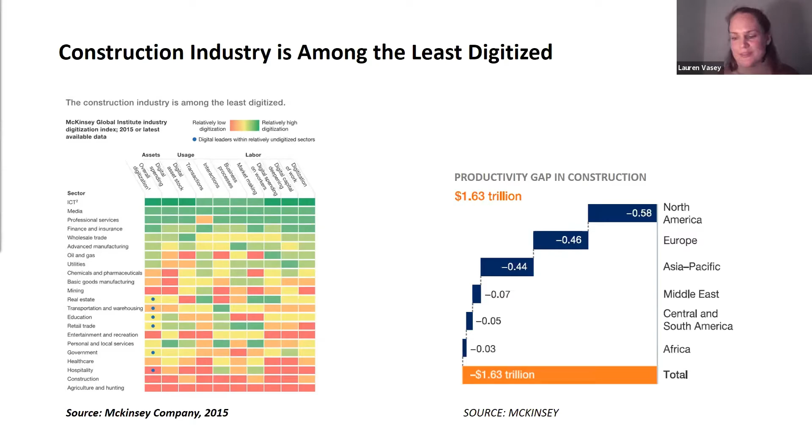So when we think about robotics in construction, we probably are very familiar with the kind of industrial robot arm and the progress that has been made recently. But what's interesting, there's a kind of rich history in Japan already in the 1970s when they were actually very interested in developing construction robotics, but somehow it failed to take off. So it's very important to think about first being aware of the past so that we don't try to repeat things that have already been tried.

Already in Japan in the 1970s, because Japan also has an economy where they have a population that was dwindling, they were very interested in construction automation. One of the early concepts they had was this single task construction robot. What didn't really work about these single task construction robots is that they couldn't take on the diversity of tasks implicit in the construction site, where construction workers have to do hundreds of tasks, not single individual tasks.

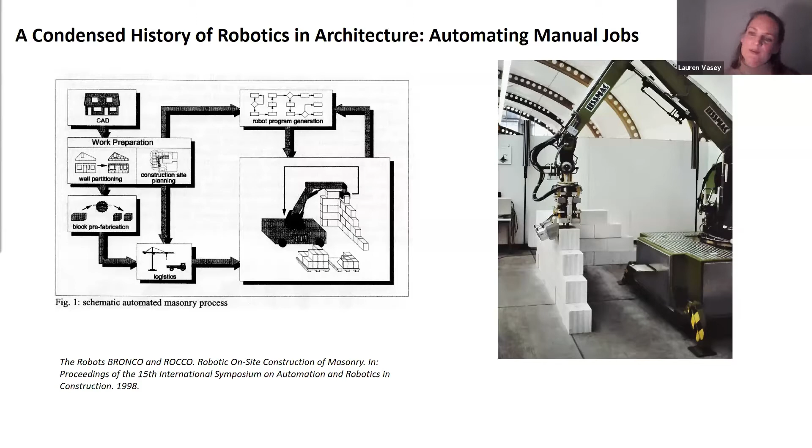And already in the 1990s, we already saw CNC controlled robots being programmed. But what was very interesting is that these first initiatives were really focusing on taking manual work, such as masonry construction, and automating it for the robot, rather than redesigning systems for the conditions and possibilities of robotic construction.

Then my favorite approach was this one developed around 2000, which was basically an attempt to put a factory floor directly on the construction site. One of the problems we have in construction is that building sites are extremely unstructured. What's very interesting about this approach is that they said, what if we build a factory floor, move it upwards, build each level of a building, and use that to automate construction.

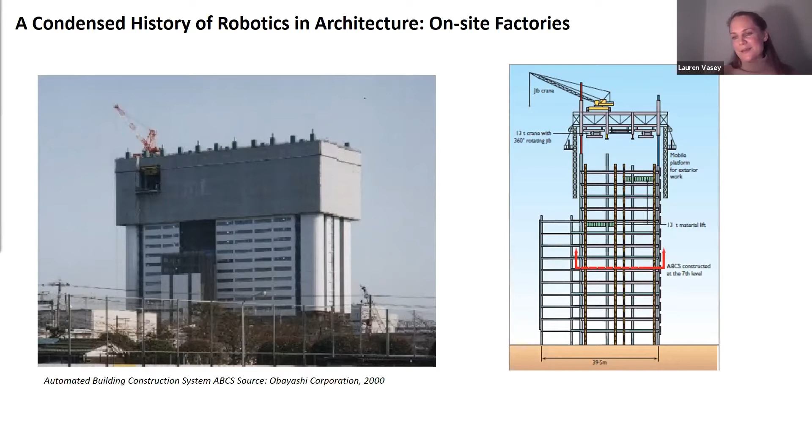And of course, that's very limiting as well, because you need this huge factory, and it's only going to be able to produce a standardized profile for your building. So it's not going to offer customizability.

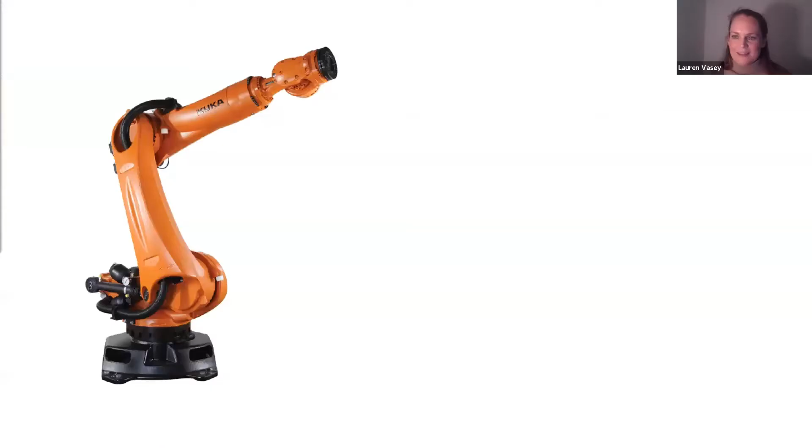So very different from the construction site. And yet we've really appropriated them for construction and for architecture. On one hand, we can say they present a lot of opportunities because they're inherently generic - they're 6-axis, they can move freely through space - but at the same time, they were developed for another set of conditions.

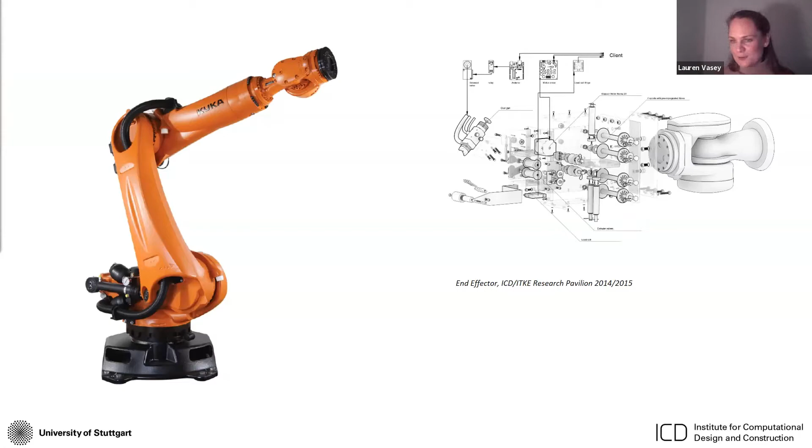But what's very exciting for us, and why this was a breakthrough about 10 years ago, is that we can develop custom effectors and tooling and really invent entirely new building systems and processes. So at ETH, the first robotics lab that really appropriated the industrial robot for architectural use was actually Gramazio and Kohler, and they did that already in 2005.

So if we think about that, that's only 15 years ago. They were the first to really use the robot for very customizable, bespoke production, where they made the most of the digital design environment to design something quite unique, and then use the robot to program and realize that very specific design in reality.

One of the first times industrial robots were deployed for large-scale permanent buildings was an exhibition hall done at the ICD at the University of Stuttgart, under the direction of Achim Menges at ICD and Professor Knippers at the ITKE. They used an industrial robot to realize this very thin shell.

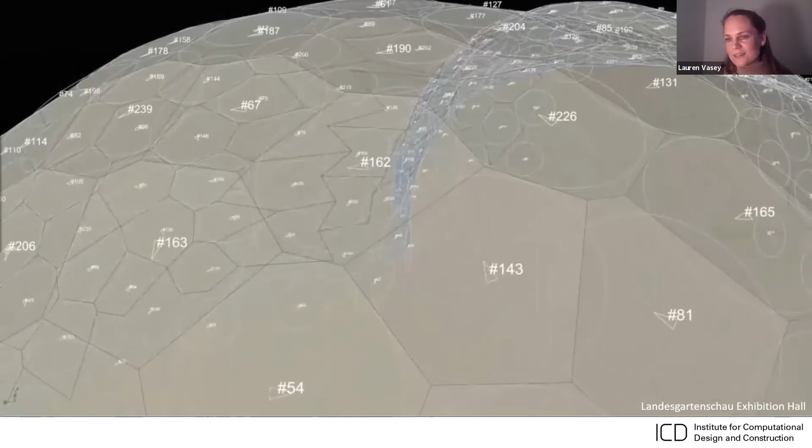Here you can see the computational agent-based framework, which treats each plate as an agent, trying to find a solution that mediates between fabricatability and robotic reachability.

What's interesting about this early use of the robot in construction is that it treated the robot the same way it's treated on the factory floor: as a very precise tool that's otherwise quite dumb. It could mill very precise bespoke joints, but it couldn't handle tasks directly on the construction site.

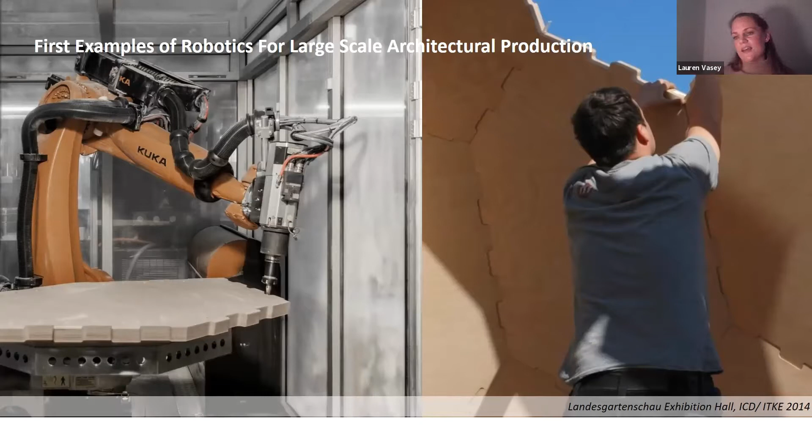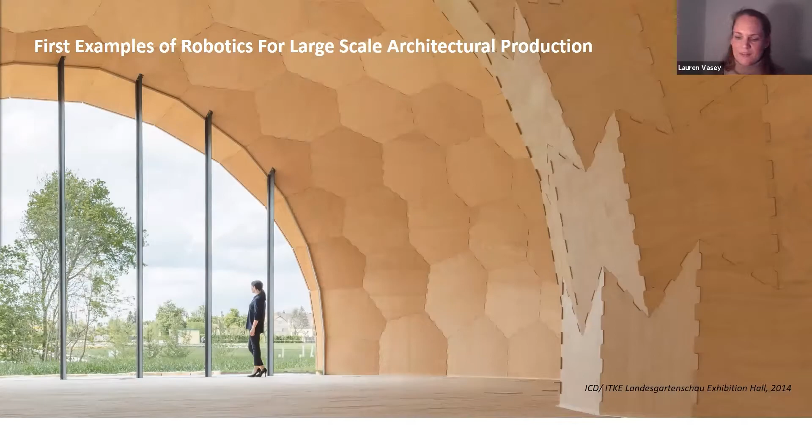Even though the prefabrication was done with the robot, everything else in the construction pipeline was done very conventionally and manually. Here you can see an image of the construction process done by hand, and here the final product. It's a beautiful example, but it had certain limitations which foregrounded early iterations of how robots have been used for architecture.

I'd argue there are two different paradigms of construction. The first is that we think about our building design process as representing what we're going to build with very high resolution, treating those plans and blueprints as the source of truth, and expecting robots to execute those plans with sub-millimeter accuracy.

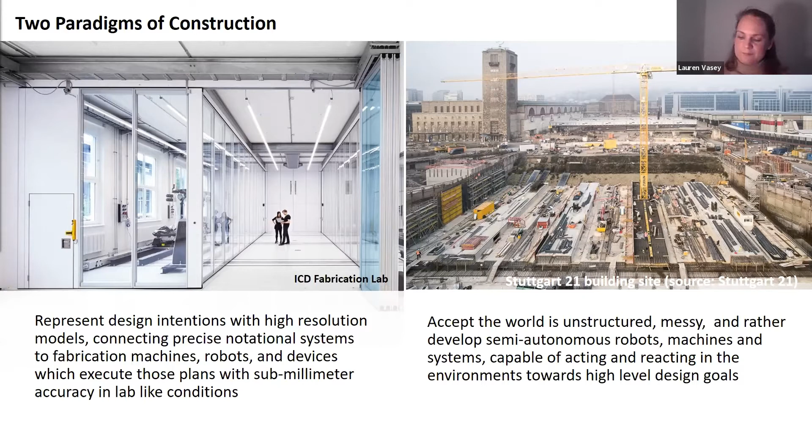On the other hand, here's a vision of Stuttgart 21, a famously overdue project. In reality, the construction site is very messy—materials are unstructured, there's a million things going on at once. Can we shift from thinking about this perfect lab-like condition to developing processes that are more robust, capable of being executed in these very messy conditions?

In the first pipeline I showed, the Landesgartenschau exhibition hall, there are a few problems that have limited how we've treated robots in architecture and construction. First, we've treated the fabrication pipeline as highly linear—we freeze the design and translate it directly into machine control code. But the machine has no underlying knowledge of the design logics implicit in the CAD geometry. This would be problematic if something unknown happened and the machine had to react.

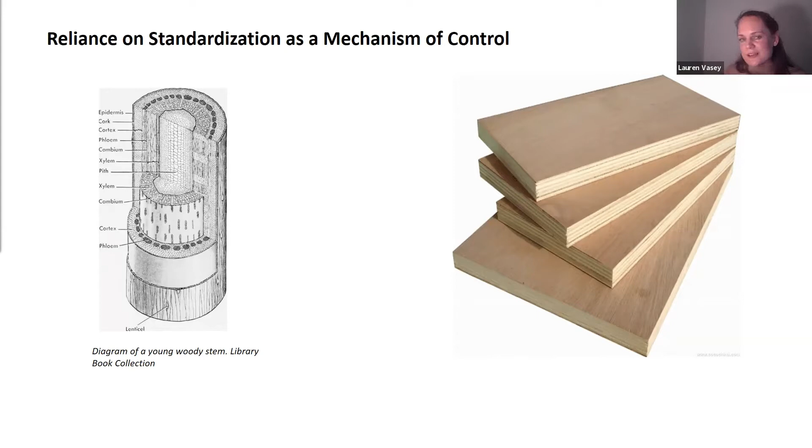We've also relied on wood being a highly engineered material. Historically, wood is not an isotropic material—we've developed techniques over centuries where we take different layers to produce this highly engineered material. This is a mechanism to control tolerances and mechanical properties, but we may be missing opportunities to use the innate mechanical properties of the materials.

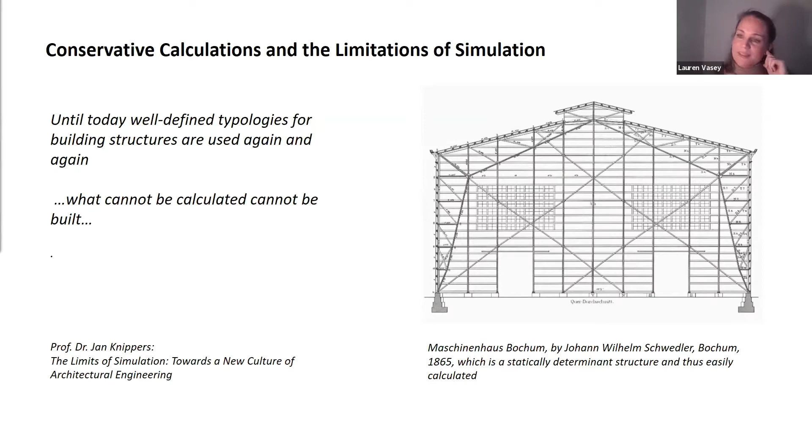In our production pipelines, simulation is also important. Professor Knippers, also at ITKE, said: until today, well-defined typologies for building structures are used again and again—what cannot be calculated cannot be built. This matters because some structures we can conceive of but cannot calculate or verify, we can't actually build. So there's a huge possible range of structures that could theoretically be robotically built, but because of conservative building codes, we can't unlock all those possibilities.

Finally, we have limitations that are operative because of how we use our tools. Our BIM models are high resolution, very precise, very specific, but certain material typologies might be flexible during production, which would be difficult to represent with our CAD tools. So our CAD tools are also influencing how we're using robotics in architecture and construction.

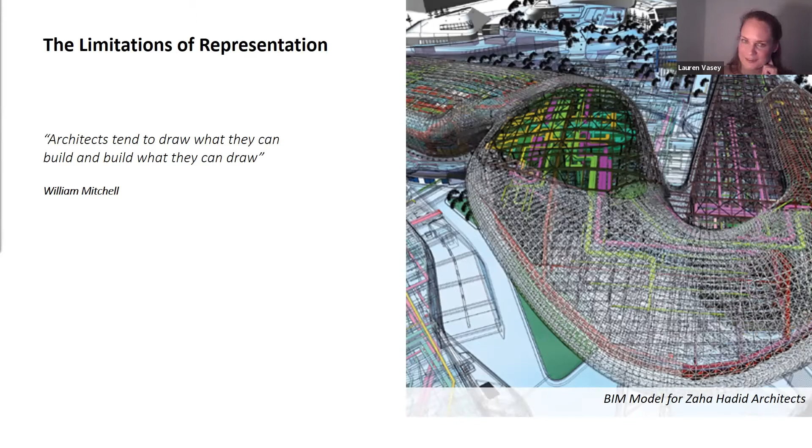Finally, in this context of Industry 4.0, we have the concept of a cyber-physical system, which is a way of saying you can take physical processes and couple them with back-end digital monitoring and digital processes.

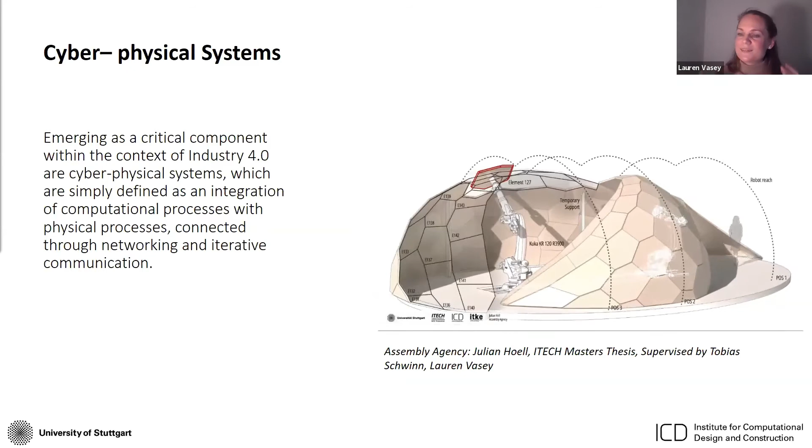And we can ask ourselves, if we really tightly couple these things, what is newly possible for architecture, construction, and robotics? There are several different enabling technologies that are really enabling us to rethink the way we're using robots. We have high speed network communication, so we can have multiple processes sharing data and information. We can make custom interfaces, use augmented reality, and embed sensors in almost everything we're doing.

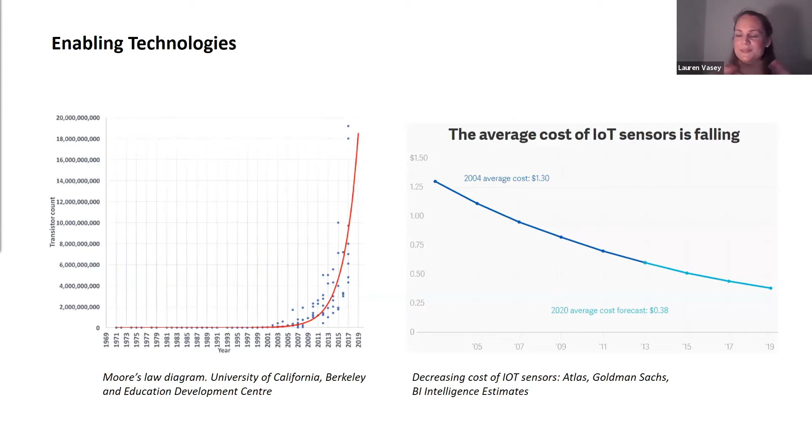It's much cheaper to do so because not only is computational power going up exponentially, but the costs associated with embedded sensors, IoT, and those kinds of things are simultaneously going down. So we have all of these new technological opportunities which really enable us to rethink the way we're using robots.

Of course, the other problem that's inherent to AEC is this problem of interoperability. So now there are new workflows, new kinds of environments, visual scripting languages that are really combating interoperability to unlock a breakthrough on a large scale.

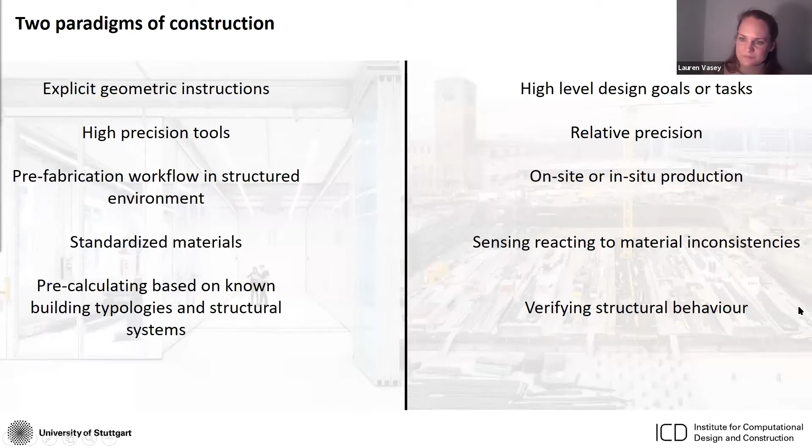And this is maybe enabling us to go from the first paradigm of construction of only operating in the lab environment to transitioning to the second environment, where instead of programming robots with very specific geometric instructions, we can think about programming them with high-level goals. We can think about using sensors and other adaptive strategies to sense and react to material inconsistencies, things we couldn't calculate, or unknown behavior. So this is a shift from many processes being compartmentalized to many processes being integrated.

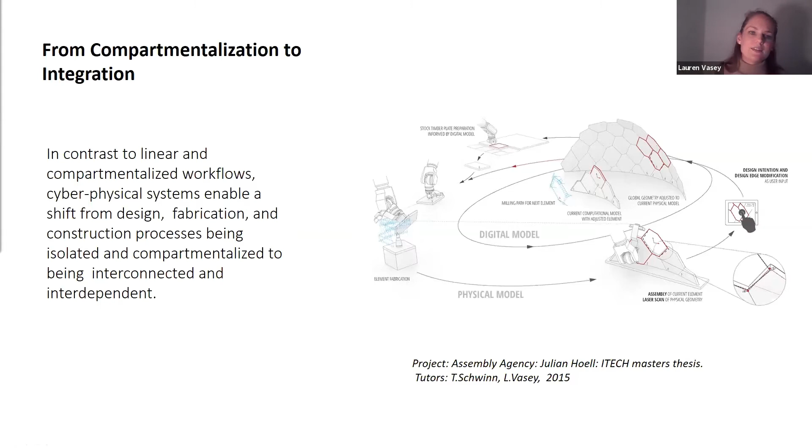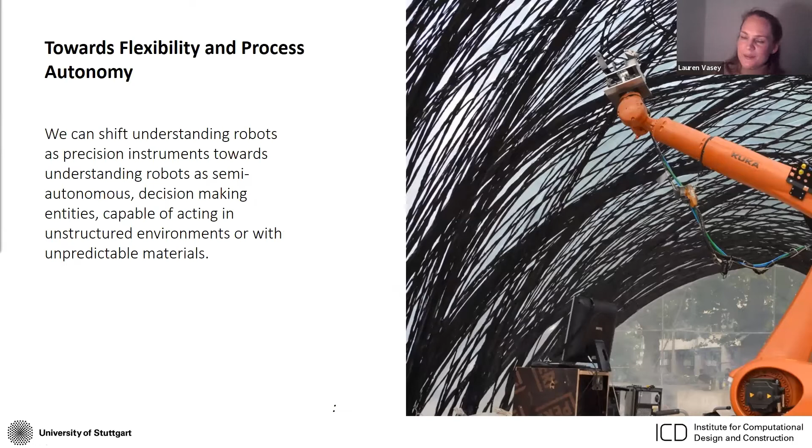It's also a shift towards process autonomy. So instead of thinking about robots as dumb machines, we can think about them sensing and reacting to their environment, which is what I'm going to show in one project.

And we can also think about how we can leverage digital mechanisms to really enhance and enable collaboration. So for example, in a scenario of human-machine collaboration, can we think about how we can orchestrate a tight collaboration where they can exchange tasks, for example?

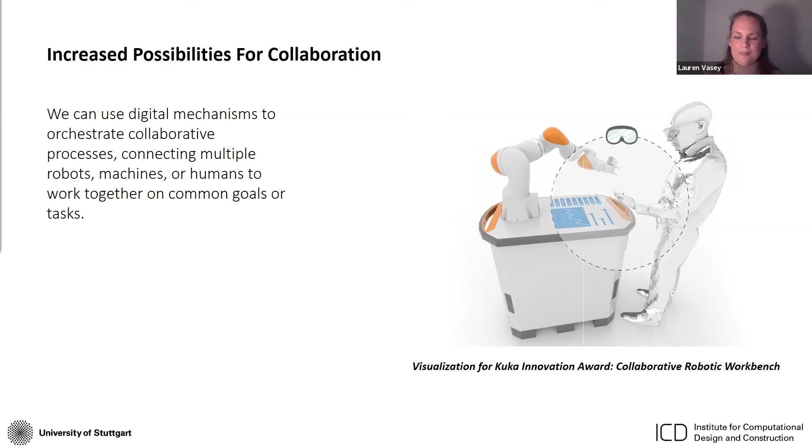And can we also think about how, instead of only using materials that are highly engineered and highly predictable, can we also think about other types of materials? So materials that are flexible, materials that are non-standard. Can we expand the design space and develop new robotic processes for these types of materials.

So the first project I'm going to show is a project that attempted to reconsider these plate shell structures that I showed in one of the early examples. This is from an ITECH master's thesis, from a student in our advanced ITECH program at the ICD and ITKE, which is called ITECH. It's basically a 2-year advanced master's program, Masters of Science.

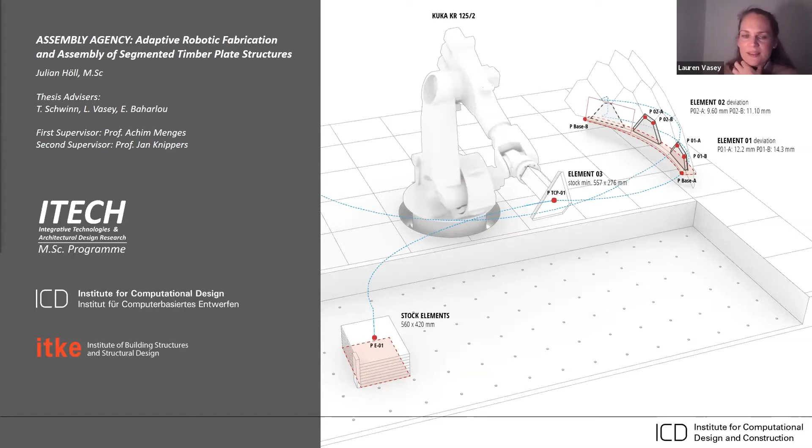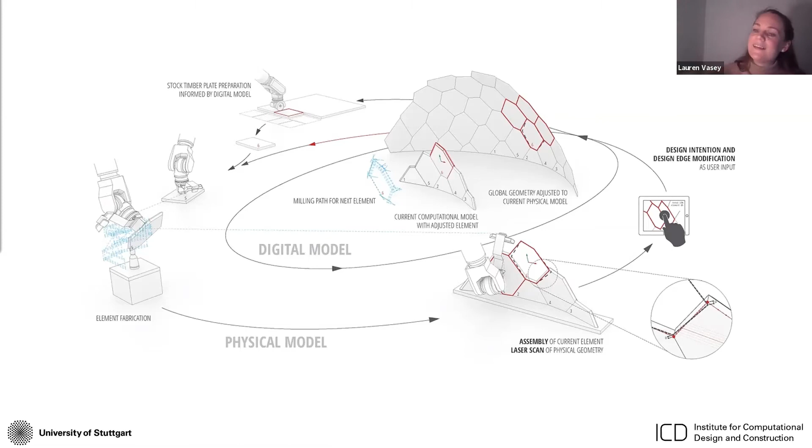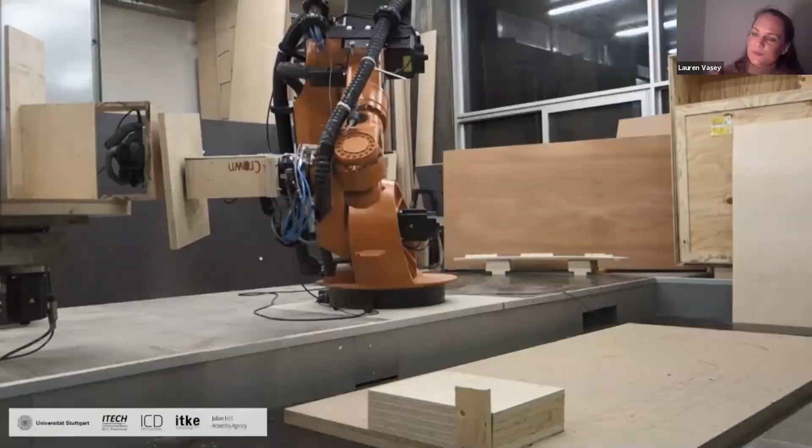So Julian developed an iterative workflow where the robot would grip the raw material stock, mill the stock, make a plate, assemble it, then scan what it had previously built, and update the digital model, all in one iterative loop. In contrast to the earlier example, where the construction and manual processes were done by hand on site, here we have a process that could actually be done iteratively, robotically.

So of course this has design ramifications because the robot has a very specific reach. Here he's showing what kind of shell structure the robot could build if it was actively assembling. This is an important consideration because robots have not been designed to really unlock a lot of design potentials. So in some senses, they're very deterministic.

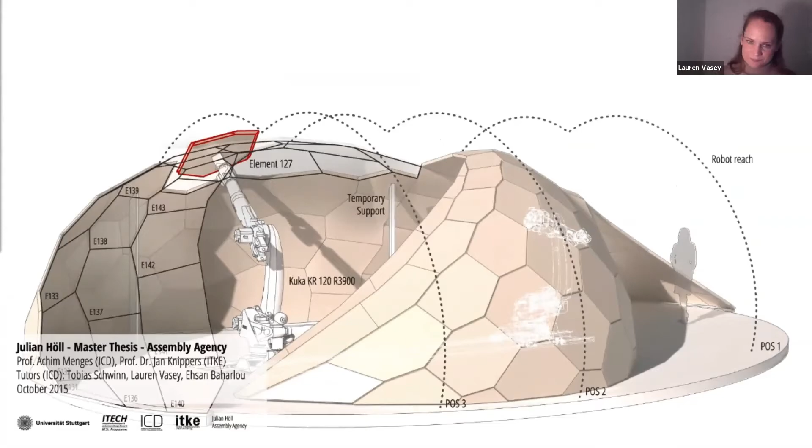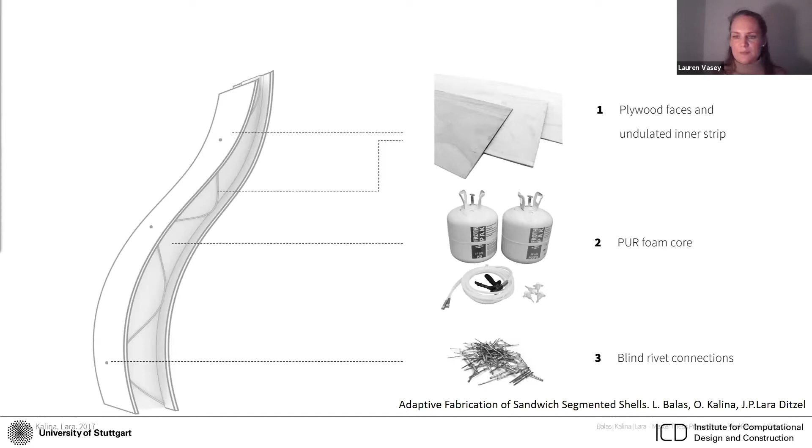The concept for this production process was basically that we'd have an effector which allowed 3 sheets of plywood to be positioned correctly in space. Those sheets of plywood would then be riveted and filled with a thermal foam. With each iteration, what was produced previously would then be scanned. Here you see the materials that were produced were part of the sandwich composite, and here you see the effector that was developed for the process.

So the 3 pieces of plywood are kind of connected at the base. Then there's a rotating fork that can reposition itself, so it can basically move in space, supporting the flexible sheets of plywood in position as it moves up. Then those things can be riveted in position. It basically makes, in section, a kind of stable plane because you have 2 flexible sheets and then one that's undulating back and forth between the 2 layers.

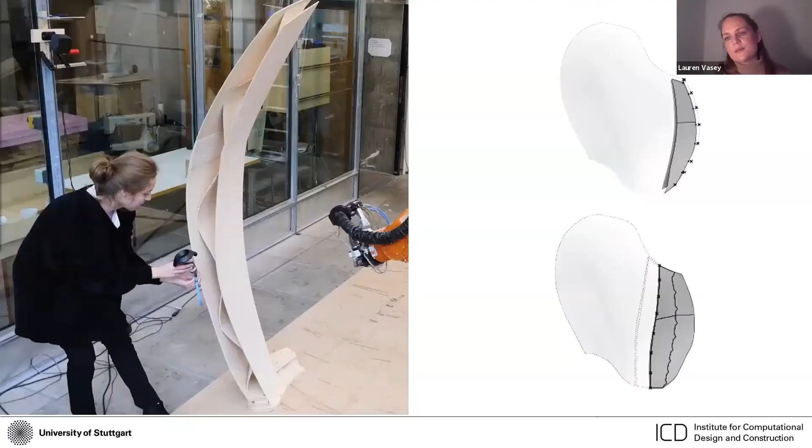So of course there is some spring back, so the question is how do we handle these kind of material effects. Here you can see the students scanning each layer and then updating the machine control code for the next layers.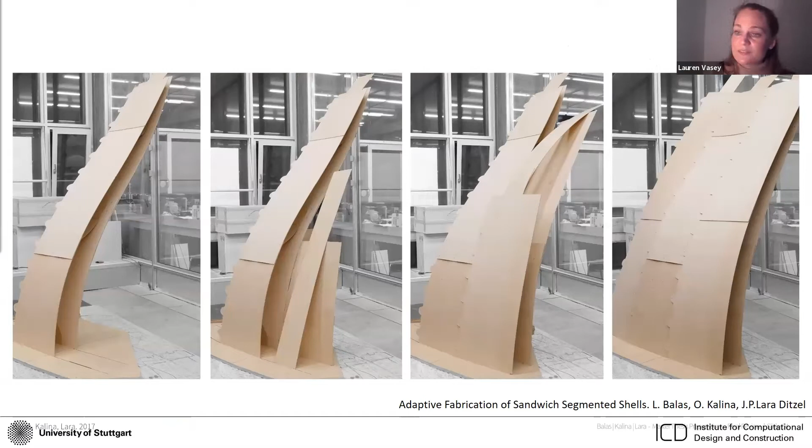So here's the vision for how it could be built. And then it would be filled with this foam, which was just a typical foam that's often used in construction. But in the future we can think about what kind of bio-based material foams might be good infill material choices that are more sustainable.

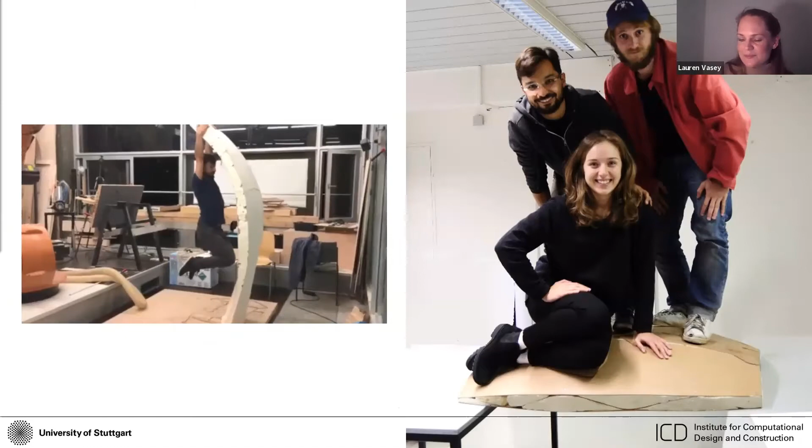And here you can see, of course, a live load test. So it's actually a very performative material system. And what I think is very exciting about it is that basically the robot was used as a kind of active formwork, and it's actually an active kind of envelope.

So this is something that is always kind of a challenge in digital fabrication. And to me, the final thing is that it really evokes the question, because we're very familiar from the previous project that these 6-axis robots have very specific design limitations. So how do we imagine the robot and the kinematics that would actually unlock the design potentials of, for example, a kind of shell geometry? So for me, this pointed to a lot of interesting research questions in the future.

So also at the ICD and the ITKE, we did some projects on a large scale group that were done in the context of a design studio. So this was a team of researchers and students, and this project was done actually already starting in 2014. It was basically a research pavilion where we had industry partners and our core team of students, which were our ITECH master students, and we were all investigating this kind of set of research questions.

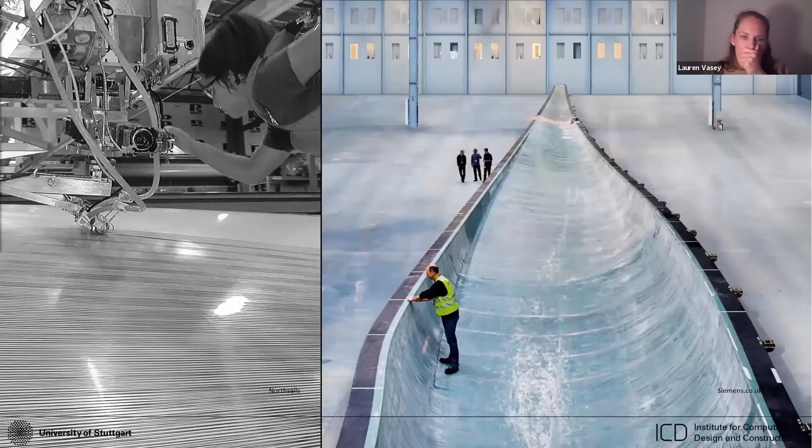So the material system in this case was actually fiber composites. Fiber composites are a very performative material system that has been engineered from the aerospace and aeronautical industries. But typically on a large scale you have many different fabrication processes, as the ones depicted for boat sails but also for wind turbines, that are basically mold-based.

So with a mold-based process, you have a mold, and then you can put the material into the mold and somewhat press it into the mold. But what's unfortunate is that you always have this very rigid formwork, and you can only make the same form over and over and over again.

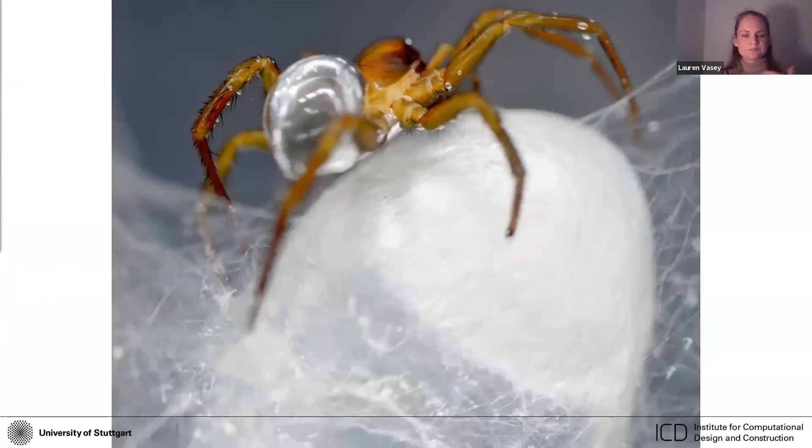So the studio actually began by investigating other precedents in nature that are also kind of fiber-based material processes. One interesting biological example is this diving bell water spider, which traps air underwater and then systematically reinforces the soft pneumatic with fiber. You can actually remove the pneumatic from the water, and it's actually a very stable compression form after it's gone through this transformative process.

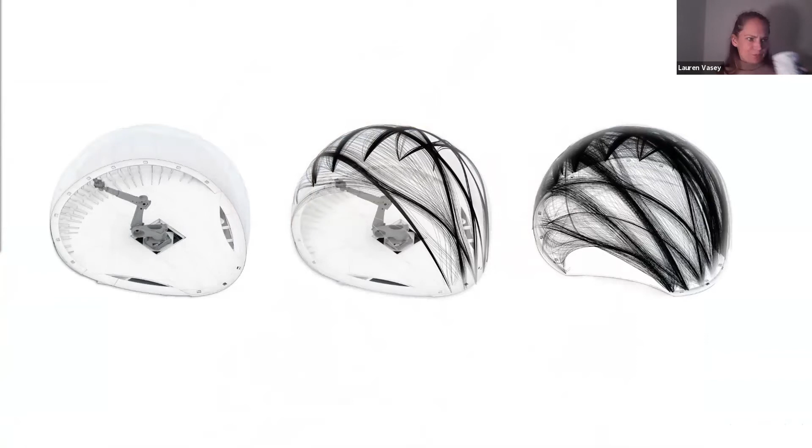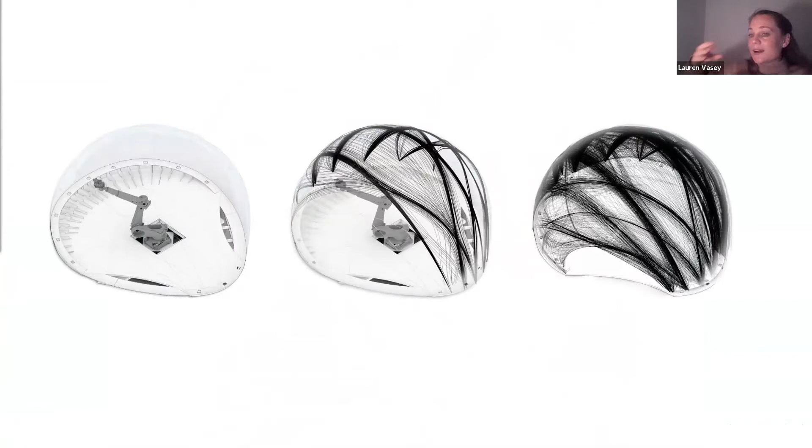So we translated this directly to a concept for fabrication, where we would literally have a kind of soft formwork instead of a rigid formwork, an inflatable formwork, and we'd have the robot at the center incrementally applying carbon fiber rovings with epoxy resin on the inside till it kind of hardened and cured, and then basically enabled that soft shell to slowly transition to a compression shell.

So the first design challenge for this project was really understanding the limitations, for example, of the robot.

So we had a robot delivered to us from KUKA. What's funny is that each KUKA robot has a very specific kinematic reach, and before we got the robot, we hadn't actually studied the reach. So when we got it and tried to simulate some paths, we realized it was more of a design challenge than we had anticipated.

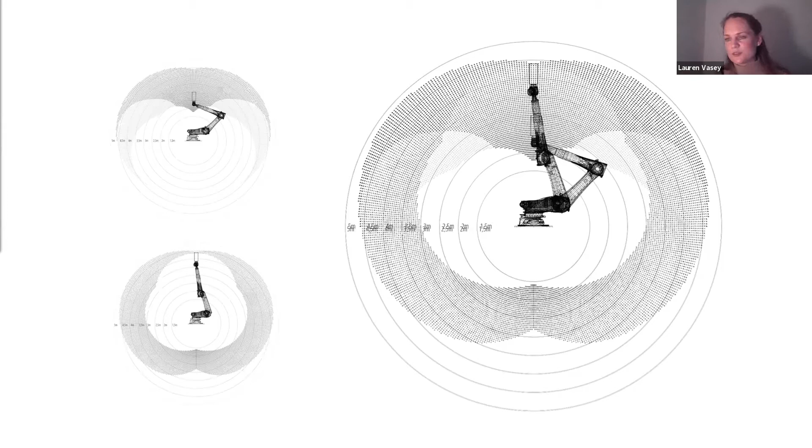So this is a kinematic study where we looked at the different IK configurations when you have a fixed base. There are a few different points along the kinematic chain that you can mirror, which means there are 2 times 2 times 2 unique kinematic configurations for any target frame on the end effector. Here you can see what the robot can reach if it's trying to stay in one configuration continuously, because you can't switch from one configuration to another mid-path.

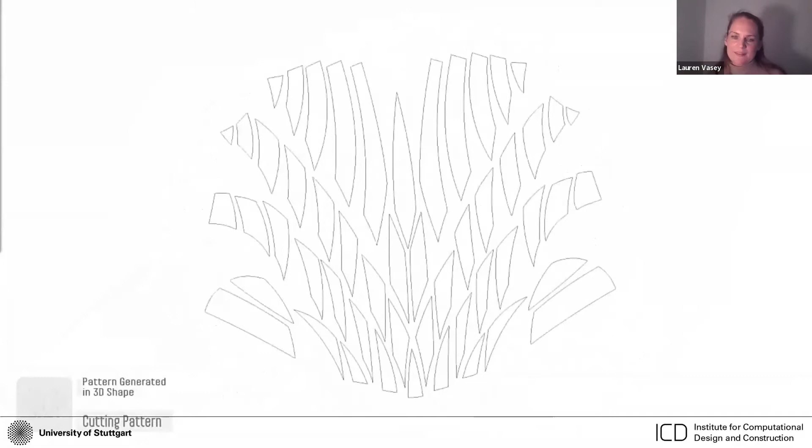So for example, we knew we needed to design something that stayed within the robotic reach envelope. Here we're making a basic physics inflation process, and then we pull back the pneumatic into the reachable envelope of the robot. So here you can see an integrated design process is very important.

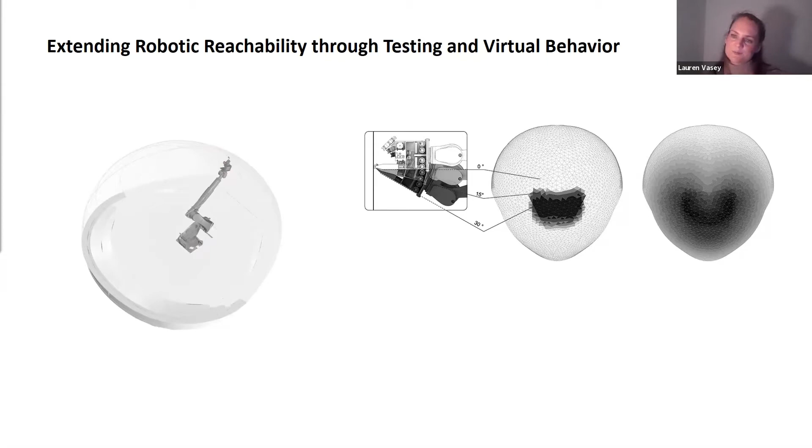What I realized later in the project is that the robot can actually reach more if it knows that, in certain positions, it can rotate its application roller. So this is a virtual behavior where the robot tests, can I reach it? If not, let me rotate my arm until I can reach it. Then it stores this value for access later when it's moving in those positions.

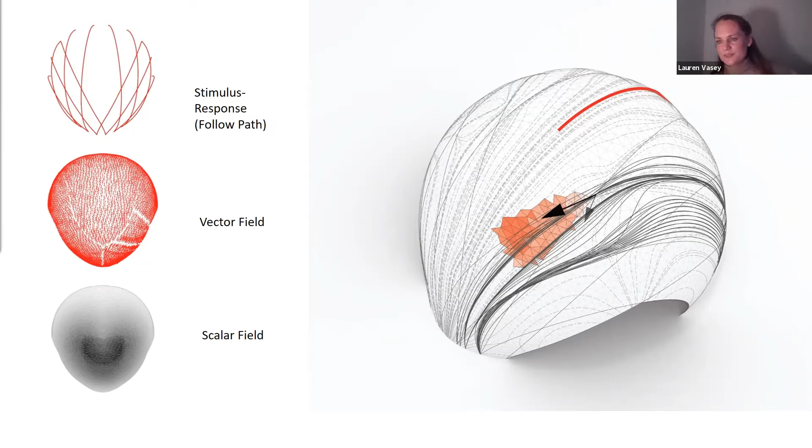What's also very different about the design process here is that we developed an agent-based system, a computational tool where you have an agent that can navigate along an environment and perceive certain things that influence its path. We had a few different data structures influencing the robotic motion that could be linked to, for example, structural analysis.

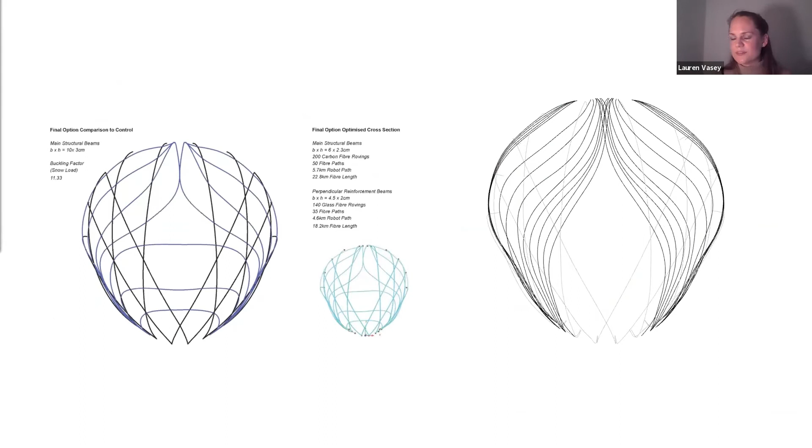You could say, I want the agent to follow these areas of high stress more frequently. Or we could already design some of the fiber bundles, see which ones had the biggest influence on the global buckling stiffness, and then pass those curves into the agent-based behaviors.

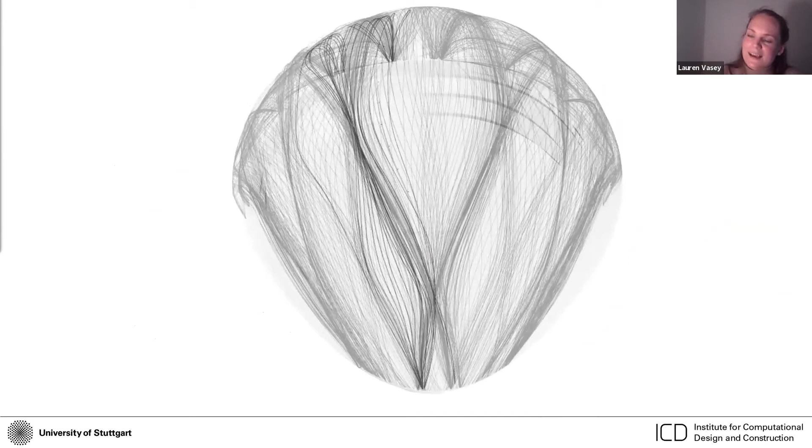So in the end it became a design tool where we were developing the logics for this virtual robot in the CAD space to navigate and generate fiber layouts, respecting different constraints but also different inputs. It became a very open-ended design tool, and you can imagine it could eventually be uploaded directly onto the robot brain to enable it to react autonomously.

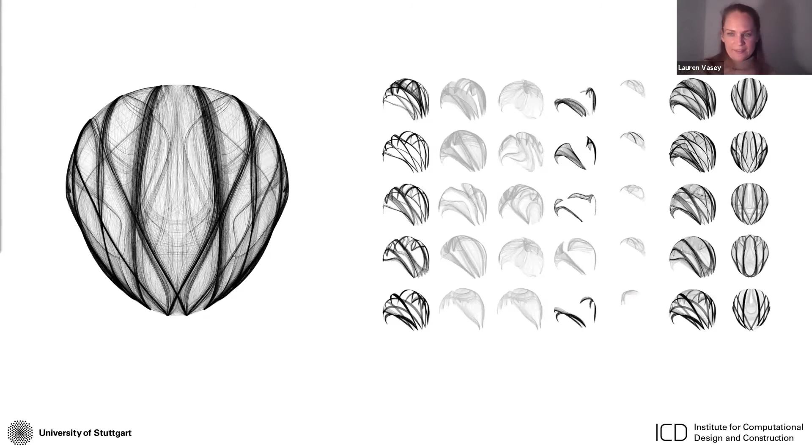Here you can see that we could generate very quickly a lot of different iterations of viable fiber paths. At the same time, we had to develop an end effector that would enable us to sense and react to the unknown position of the inflatable.

So here you can see an end effector - I'll try and play the video again. It was equipped with a load cell, so it knew if it was pressing the membrane, and it knew how much to come off the membrane, for example.

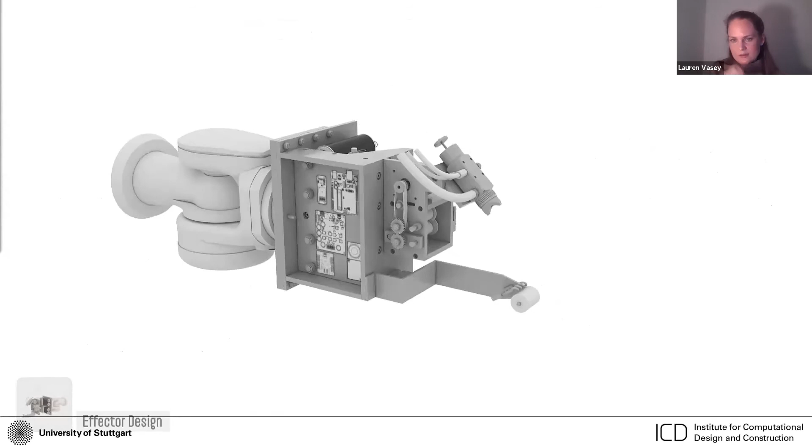At the same time, it was trying to synchronize how much it was pulling these carbon fiber rovings off the rollers, synchronizing the degree to which it was extruding with the speed of the robot, and also spraying glue.

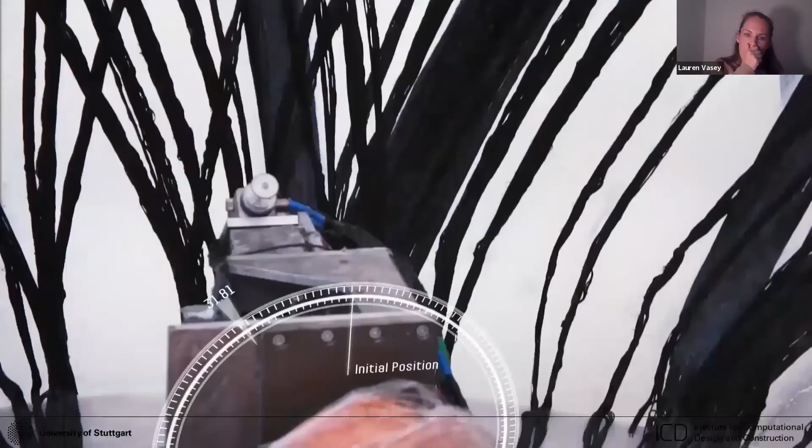So here you can see a video. All of these videos are mostly available on the ICD Vimeo web page, so check them out. You can see the process - it's extruding, and it's also adjusting its path as it's going. It's slightly over extruding because if it accidentally under extruded, you could actually pull off what you had just previously laid.

So we could move about 1 to 2 meters per minute. It was a very slow process, but in the end we were able to produce it in a short amount of time because it was such a lightweight construction system.

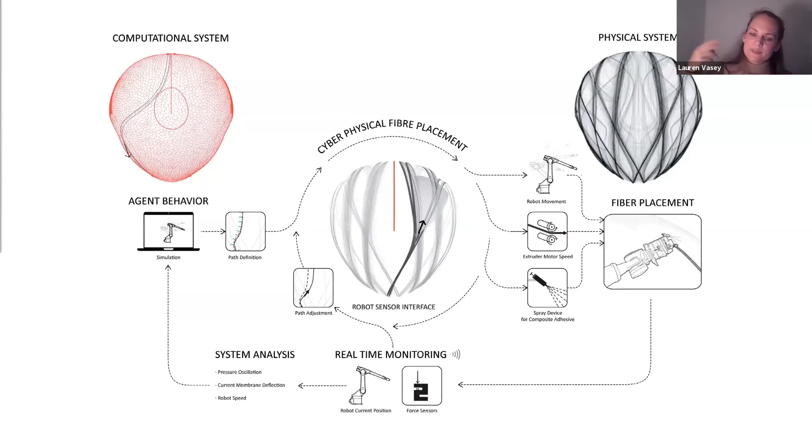So here you can see the whole digital workflow, where with each iteration there was the agent-based code, which output a rough fiber path. The robot was constantly adjusting for its pressure, and updating the motor speed and the spray device at the same time.

And here, when we were inside watching the process, we could get all the feedback from the whole system - we can see what the pressure is, and it's telling us if it's too high. Of course, sometimes it's advantageous to have a human in the loop to be aware of the signals you're getting from everywhere to aid in troubleshooting.

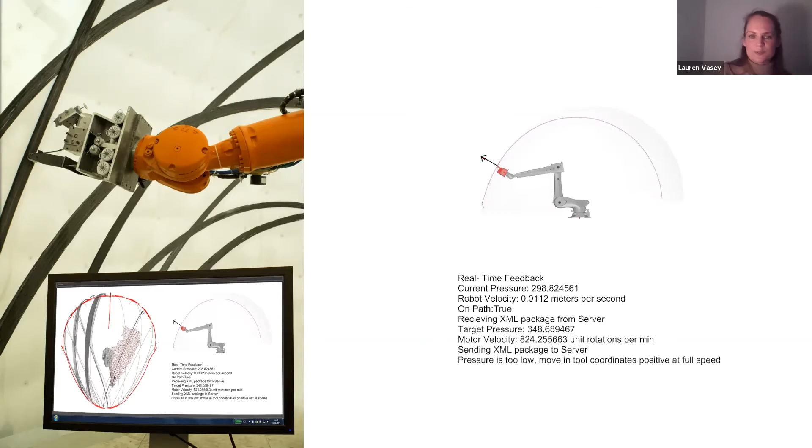So here you can see kind of later in the construction process, after we kind of released, we had this protective tent over the structure.

After we removed that, we were about to release the pressure entirely and cut out the openings. And of course, there was a lot of troubleshooting during the process, because actually what we built we had not pre-designed at all.

During the process, we had to rerun the agent code on almost a daily basis based on how the construction was going. So we really can't think about design as a process where you design something, then realize it, and then try to build it.

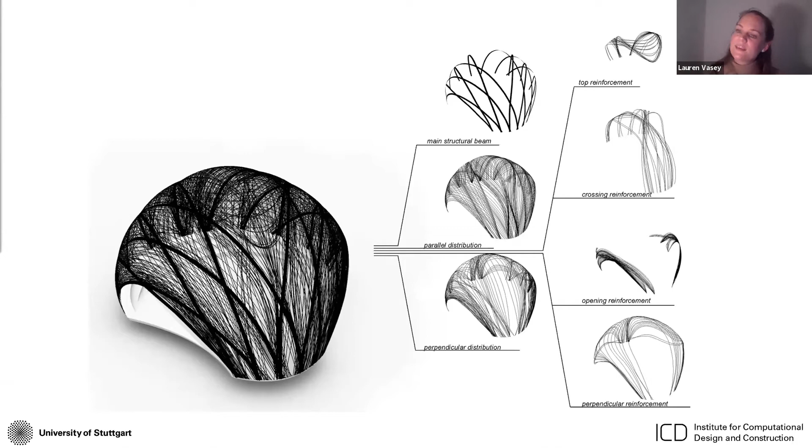In some cases, it's very advantageous to be able to adjust and fine-tune things on the fly in response to the real process. And what's also very exciting, a new area of research, is that we have the ability to actually record the data we took during construction.

One thing I noticed is you can actually prove, based on how much the membrane deflects, that the deflections change by up to 30 millimeters over the course of time. So what that tells us is that the structure itself became much more stiff with the same load.

But the interesting question is, if this structure deflects less, how do we relate that back to real material properties? How do we inverse engineer and understand from the data we're gathering from production?

And of course, here we actually load tested it. It was up on our campus for up to a whole year, and it took about 560 kg of load, but it was only a 260 kg structure, so this is quite interesting.

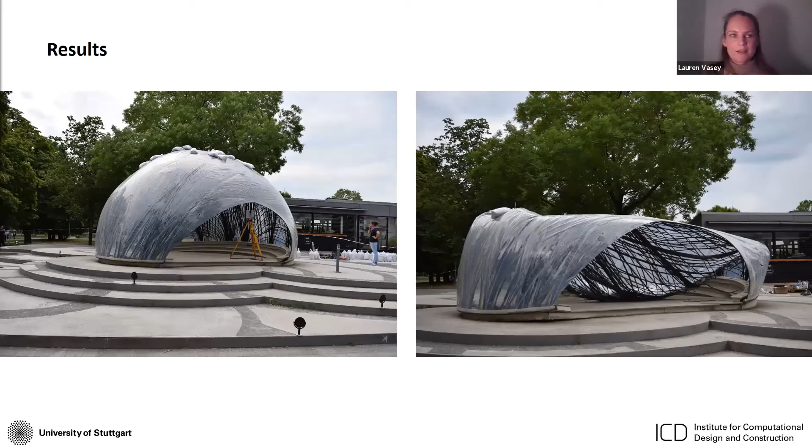So here you can see the beautiful qualities of the prototype. It enclosed about 40 meters squared.

So the last project, I'm going to show two more projects very quickly and then wrap up with some final thoughts. This last project was executed in a similar framework as the previous project.

It was a research studio done with a team of researchers such as myself and a team of students under the guidance of Professor Achim Menges and also Professor Knippers, some other partners, and some industry partners as well.

So in this case, the research question became, how do we address this issue of scale? Because in previous robotics projects, for example the bubble, you saw how limiting the kinematics of the robot can be.

So the question was, how do we build with a robot that is not constrained in terms of its mobility? The obvious precedent here is work done at ETH.

Already the Frac Tower was done between Matthias Kohler and also Raffaello D'Andrea, and they used the robot to build, for example, a kind of styrofoam tower and also a tension-active bridge.

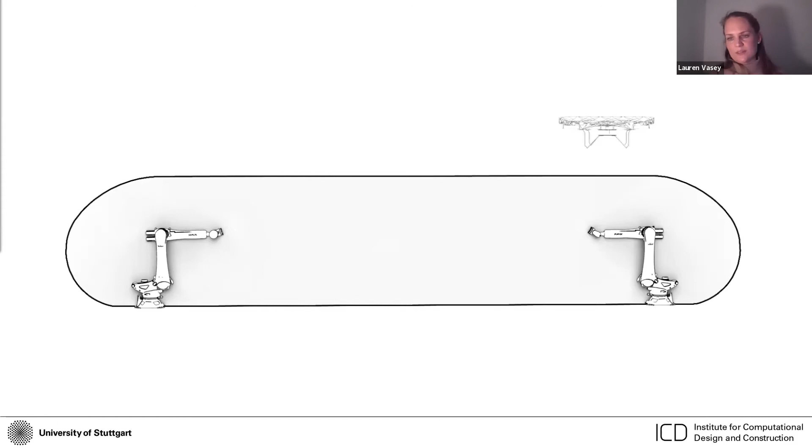So we can still maintain the high payload advantages of the robot, but also really extend its workspace by connecting it to a fully untethered UAV drone.

So here you can see the experimental setup. We actually did this in our lab environment.

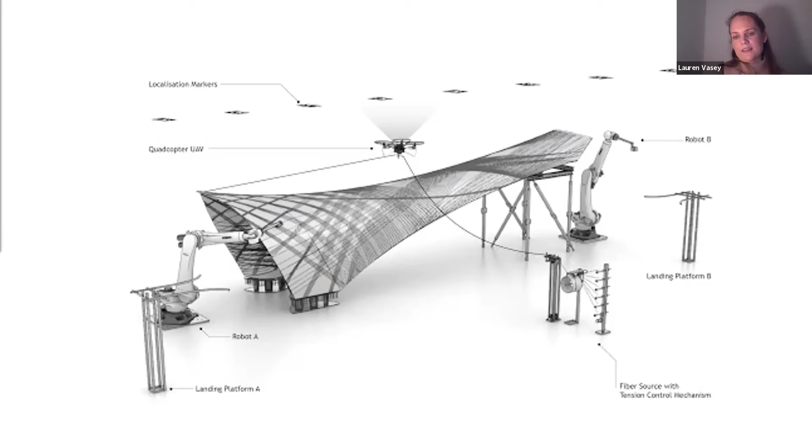So you have two different robots standing at two ends of the corridor, and we had the drone moving back and forth with two sets of landing platforms, and also supporting hardware, and for example a kind of tension control mechanism.

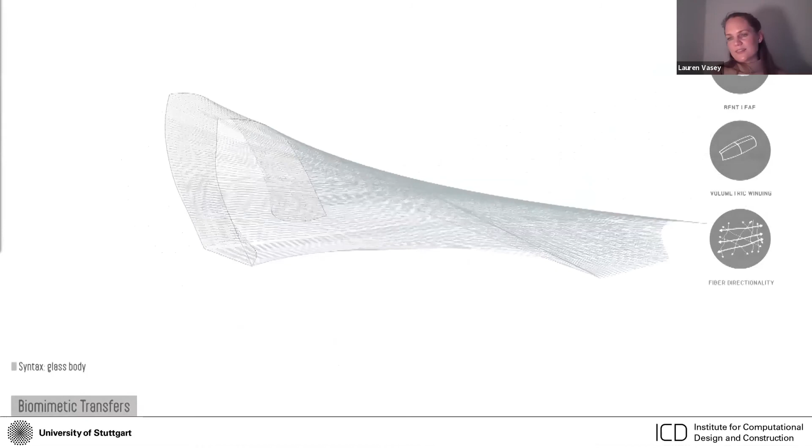So in this case, the design process was fairly deterministic in that we knew we would make something cylindrical, but it was really about fine-tuning what we could build based on getting a good fiber layout with a suite of fiber layout tools and simulation tools as well.

So here you can see some of the design development, but what was important is that this robot, for example, was built entirely from scratch.

So there's an interesting kind of trade-off. On the one hand, we can have robots that are taken from industry or appropriated from other contexts, and they lower the difficulties in programming them, so we can get them up to speed and working. On the other hand, there might be functionalities that we need for construction. So being able to develop a proof-of-concept drone just for moving a piece of fiber back and forth at a reasonably high tension widely expanded the design space.

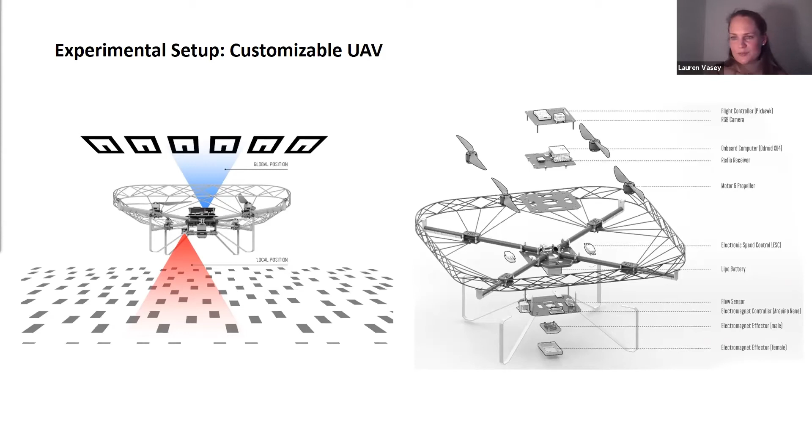So I think working back and forth between off-the-shelf or already known industrial tools versus developing custom hardware, being able to go between those two types of machines becomes very advantageous.

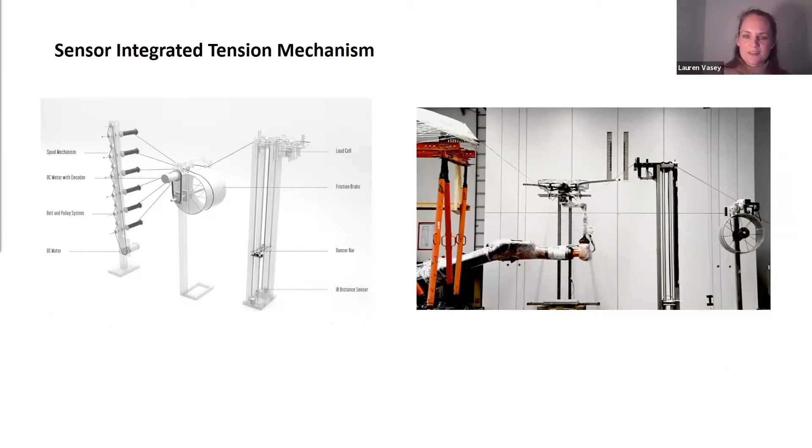And at the same time, we have to develop more supporting hardware. So in this case, we developed a custom tension mechanism that would actively extrude when the drone was flying, so the drone didn't have to pull all the fibers. But at the same time, when the robot was winding, the tension mechanism would have an active weight, called a dancer bar, so the high weight would guarantee a high tension on the winding.

So here you can see the whole process. The drone is using an April tag-based localization strategy. The whole process is achieved because this end effector, which is a tube, is exchanged between robot and drone.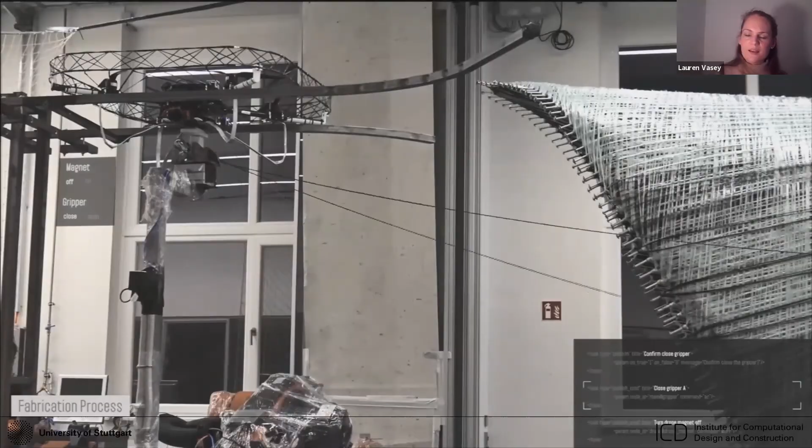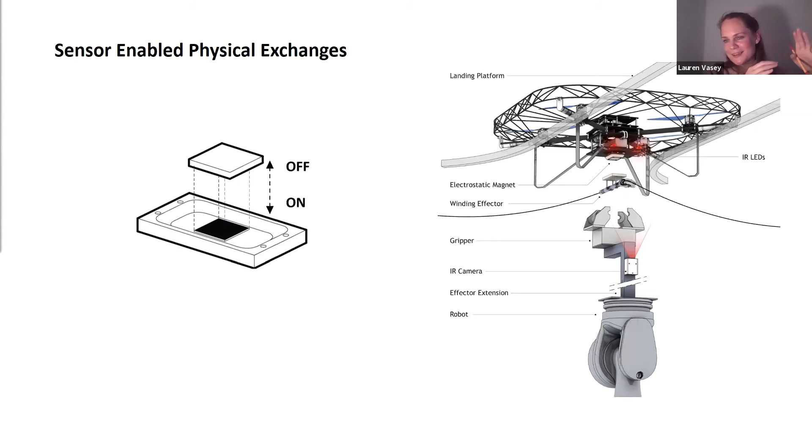So on the drone side, it can grab the end effector by electrostatically activating a magnet, and on the robot side, it's just a pneumatic gripper. So through this set of hardware mechanisms with two different attachment points, we can really achieve multi-robot collaboration. So here you can see, after it grabs it, it finds it with an IR LED, moves the relative transformation, then it moves around the frame and winds the point.

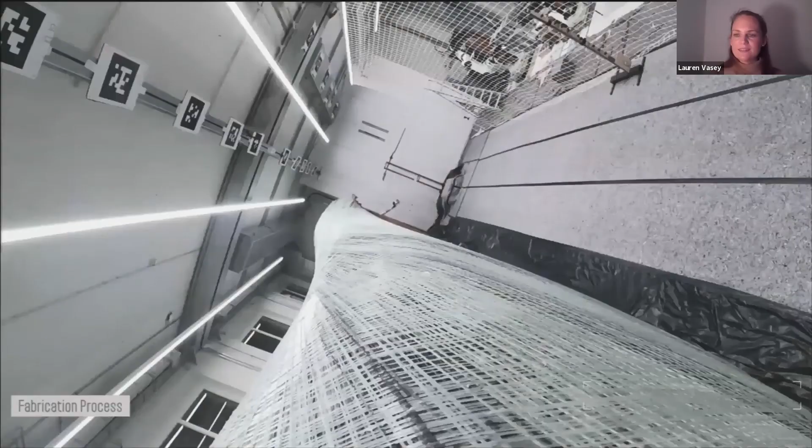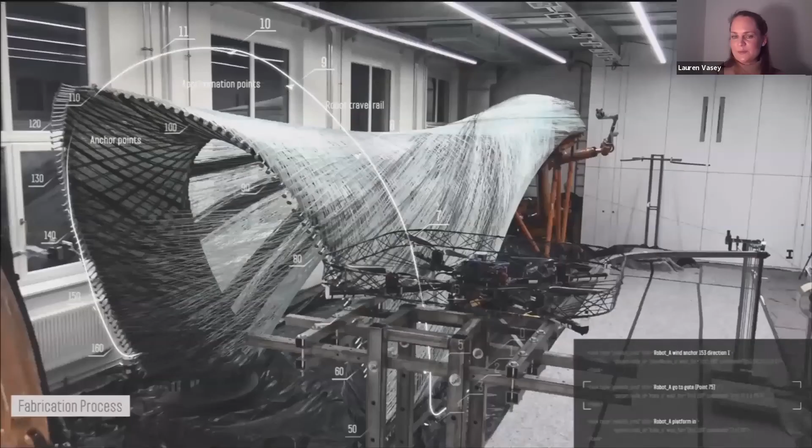So actually, in comparison to some of our other fiber winding projects, which you might have seen or can check out from the ICD website, this is actually a very inefficient process. But the innovation here was really in the multi-robot collaboration and the high-level control strategies.

So to organize this whole project, we had a custom design tool where we took a winding syntax and compiled it into a sequence of steps that needed to be executed each time. This is called a task list.

And this task list would be loaded, and then it was a little bit like baton trading. So it would send this batch of tasks, the robot would execute that task, and when it had finished its task, it would report back. So this is basically how we orchestrated the multi-agent communication.

During the project, what's also important is that here we were also using ROS. ROS is a state-of-the-art robotics middleware. It's based on publish-subscribe, so it's very scalable and very interesting.

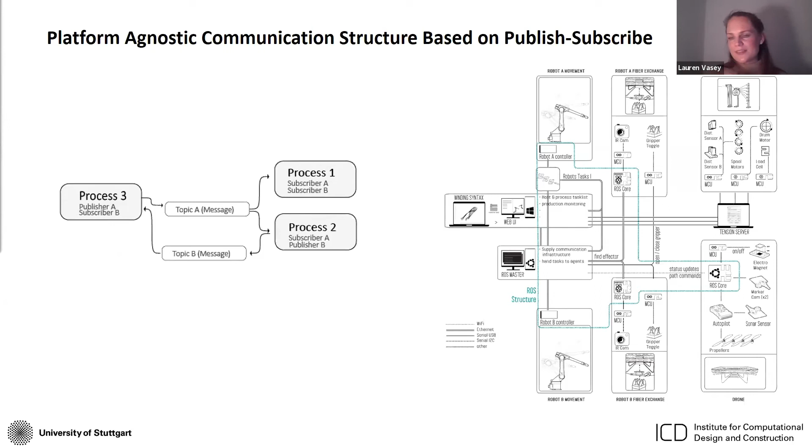I mean, the main challenge here is how you make a CAD design environment and the ROS-based tools compatible with each other. And this is a big challenge, I think, for future developments: how we take these domain-specific tools and domain-specific libraries with functions and really develop ways that they can be integrated and interface with one another.

And here, of course, we also had to develop a workflow for the online and adaptive control code. So here the robot is running some code. It basically has a set of subroutines, which might be winding, it might be gripping.

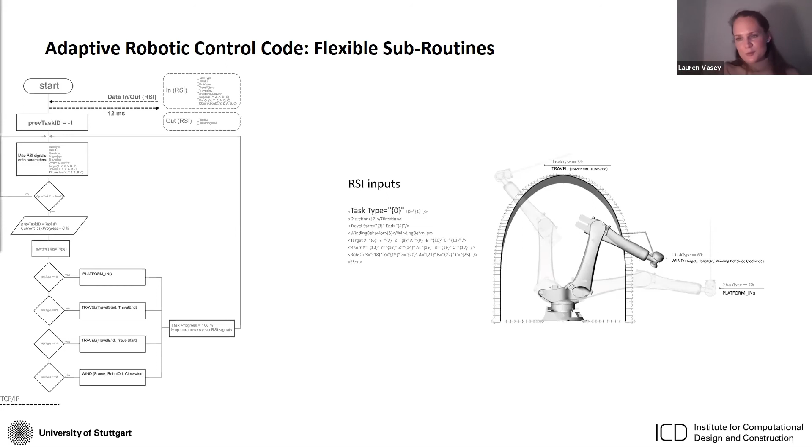Whenever it gets a package of data, it checks what data package it got, which tells it what task to run. If it's a different task than what it had previously run, it will say, I want to run task 50, therefore I'm going to be moving around the platform. It executes that task, and then the control loop iterates until it gets a new task.

So in the end here, we also produced the large demonstrator. As I mentioned earlier, it was a very inefficient process, so laying one fiber, for example, could take up to 5 to 6 minutes.

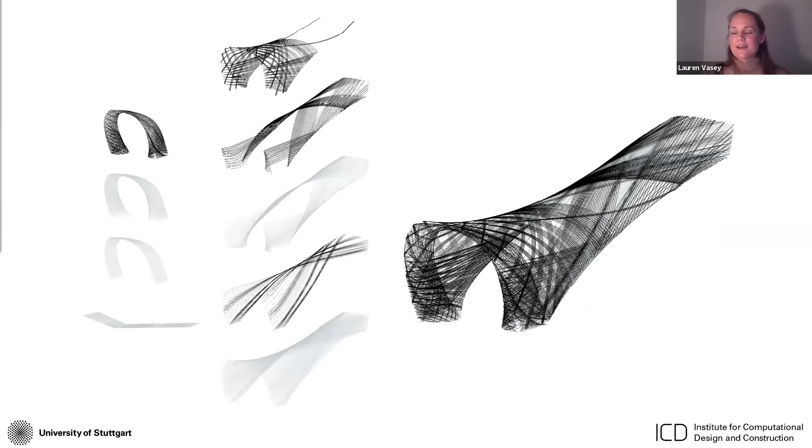We realized that the drone, even though the communication platform was very robust and a huge accomplishment, is not the perfect solution for this kind of high tension collaboration. Something more like a cable-driven system would make more sense, so that's something we looked into in follow-up studies.

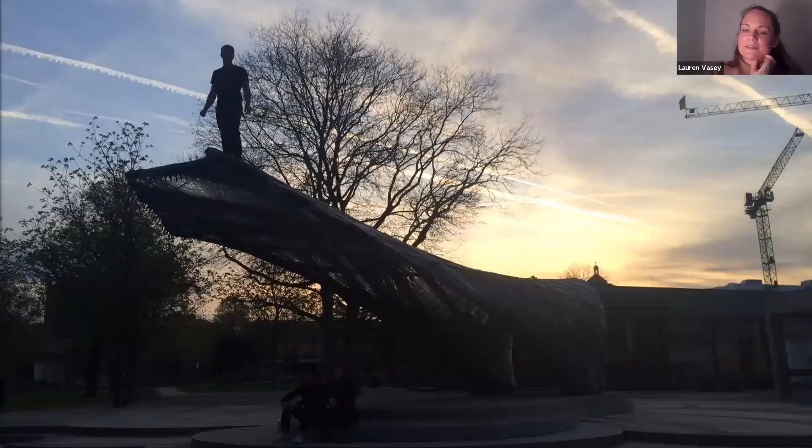Here you can see some load tests. With the drone process, because it was so much faster, we actually ended up doing many of the parts of moving the end effector back and forth manually. This became much more fast and efficient, which raises an interesting question of when you plan strategically to include humans in the fabrication loop and enable them to intervene. This is an open point of development that I think is quite interesting.

And of course, here are the students. This pavilion is still usually on display, I think it's probably in ZKM.

I'm probably just going to skip through this last project and wrap up quickly. I want to end with a few different thoughts on how we pursue robotics in construction, how we can think about making robots on the construction site, and robots building buildings and new structures a viable reality.

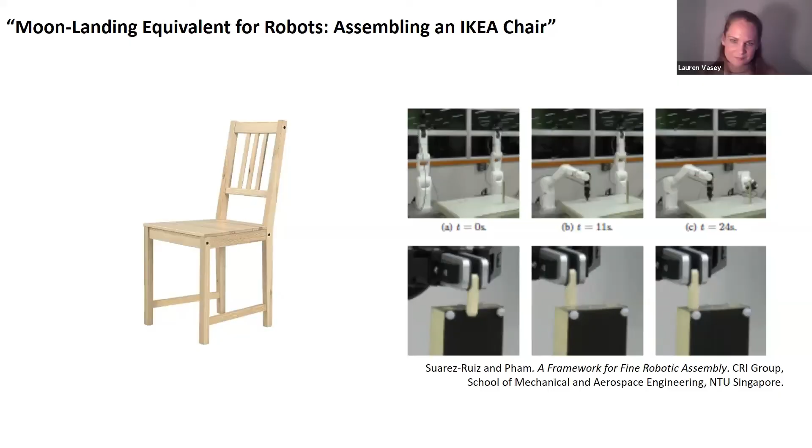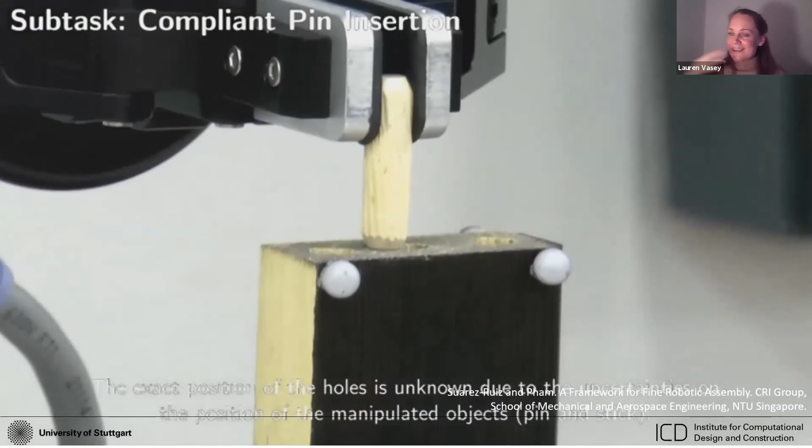I think it's very interesting to see how this is sometimes approached in robotics. Here, for example, is one of my favorite projects to show, which is the moon landing equivalent for robots: assembling an Ikea chair. The video here is very painful to watch. The robot—I think there are better videos of this—but basically, Ikea chairs have been developed from a very specific logic of assembly, which is the logic of human dexterity.

So trying to watch a robot do something that was developed from the perspective of manual assembly is very difficult, because ideally we want to redesign chairs and buildings and building structures to really unlock the potential, or to enhance the ability of the robot to actually do its task. We really need to approach this from a design perspective, understand the limits of the robot, and develop new systems that will enable robots to construct with the sensor capabilities they have at their disposal right now.

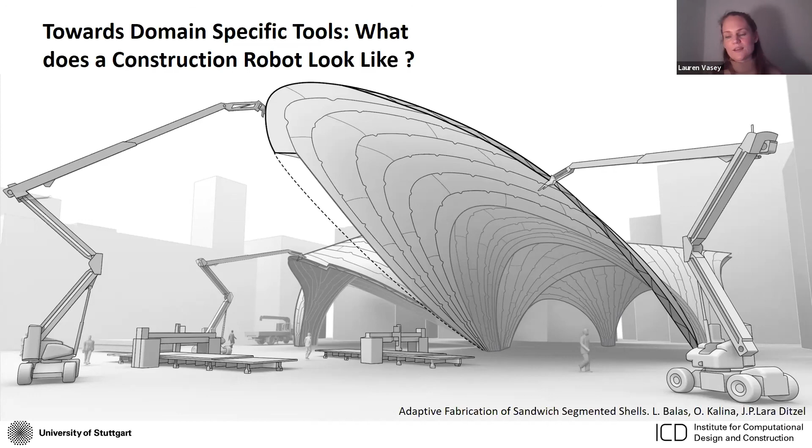Then the next question is really, how do we incentivize domain-specific tools? What does a construction robot look like? We shouldn't, for example, just appropriate industrial robots. We should try to incentivize fundamental research on what a generic construction robot could do that could execute many different tasks, and maybe hybridize it in a system with very task-specific robots, like we saw not only in Japan but also in some of the earlier robotics projects I showed.

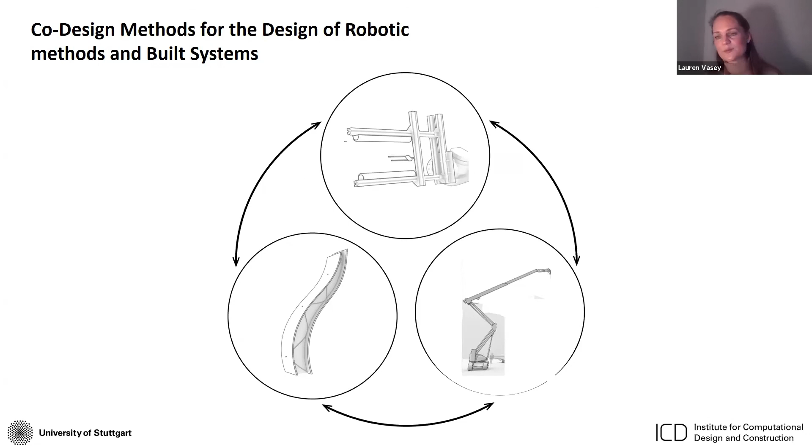We should really think about this not as a process where you take the robot and then develop the building system, but as an integrated design process. As I showed in the second project, the tooling, the material, the built system, and the robot building that project all need to co-inform each other. It really shouldn't be a linear process.

The next question is really accelerating accessibility. How do we as an industry address the lack of interoperability? One great initiative at ETH Zurich, initiated by the Block Research Group but now also across many different ETH groups and universities worldwide, is basically a framework of platforms for research that are non-proprietary—how do we develop code that you can integrate into all of these systems?

And then, of course, as for the research institutes I've been lucky to be affiliated with, we also have to approach these questions looking from academia but also looking at industry and practice. It's really about how we combine the interests of both and co-inform each other for the future of the field.